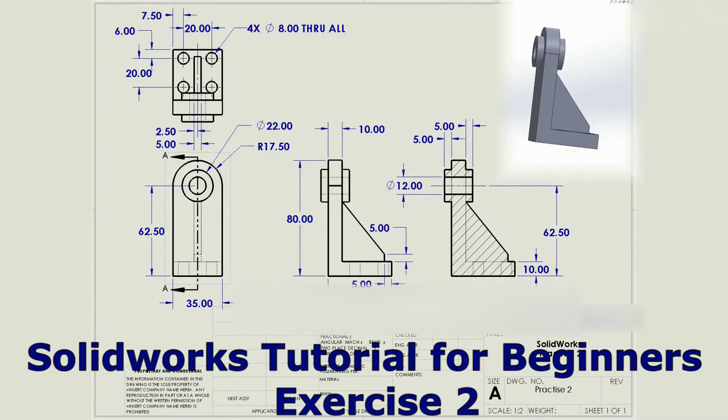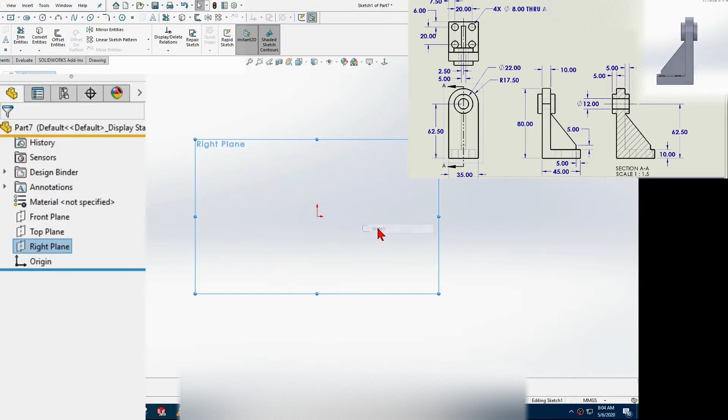I will show you how we can create a simple bracket. I will draw a sketch with the overall dimensions of the bracket: height 80 mm and length 45 mm.

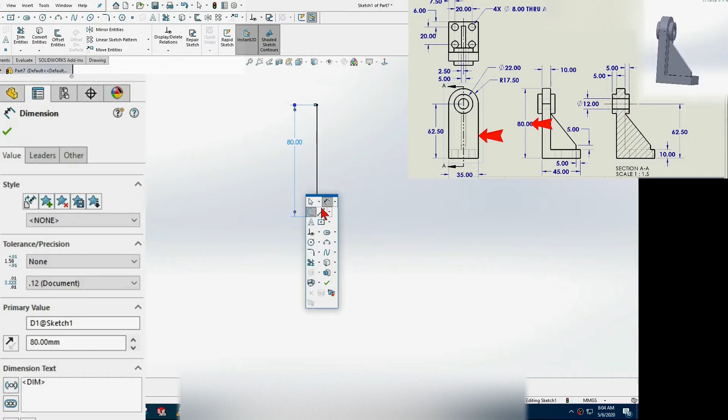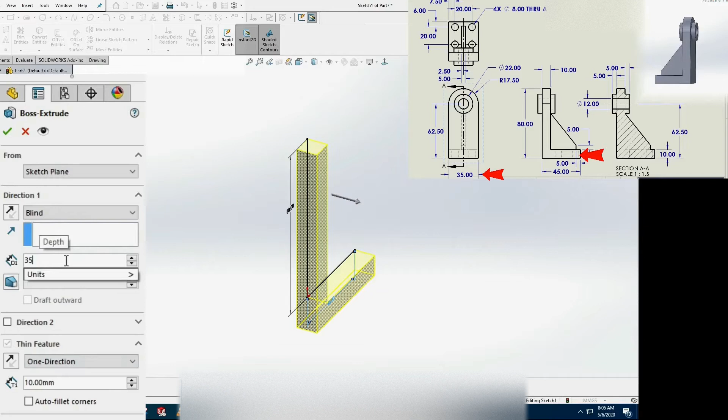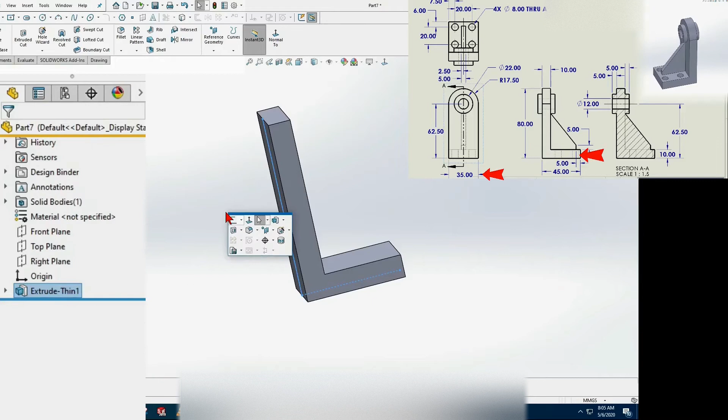Then I use Boss Extrude, Midplane, with the Thin Feature tool, setting the bracket width to 35 mm. I check the direction, and now it is OK. Next, I will make a radius of 17.5 mm, and use the Fillet Full Round tool, selecting 3 faces.

Cut a hole of 12 mm.

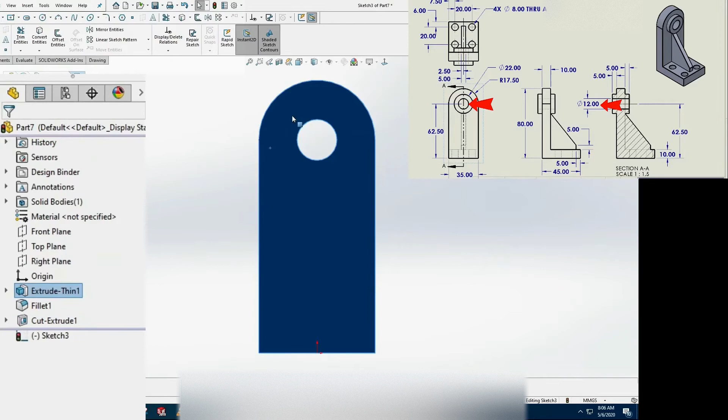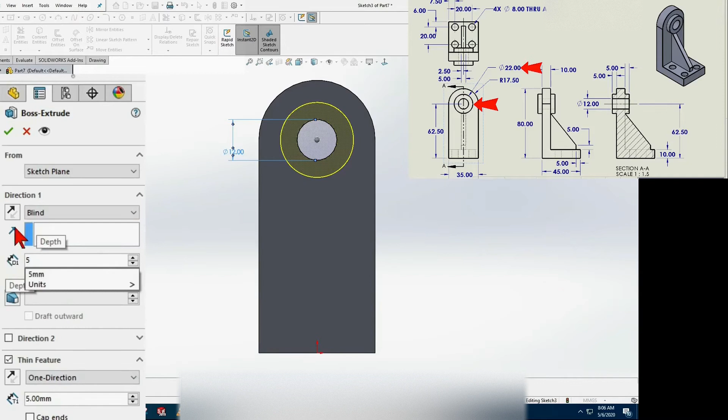Let's go ahead and create 2 washers. For the first one, I use the Boss Extrude Thin Feature tool. For the second one, I will use the Mirror feature, but first I have to create a plane for the mirror.

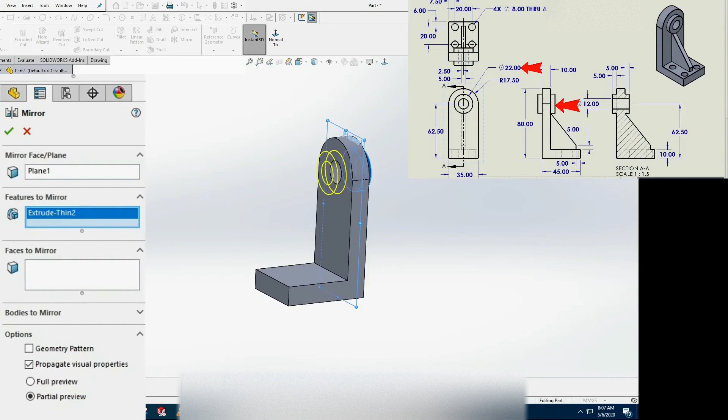So, the washers are done. And I am going to create a rib using the Rib tool. But first, we need a sketch.

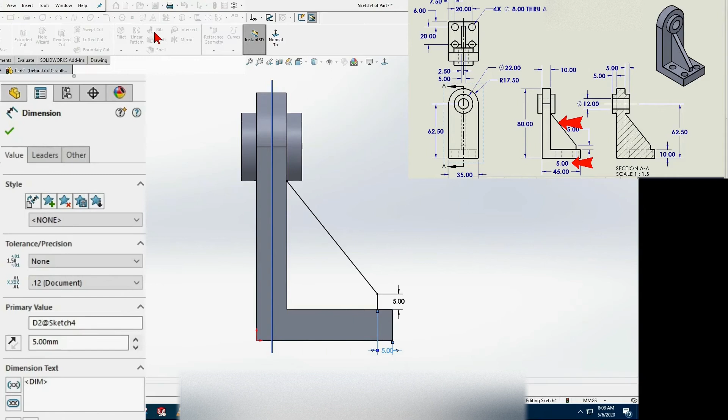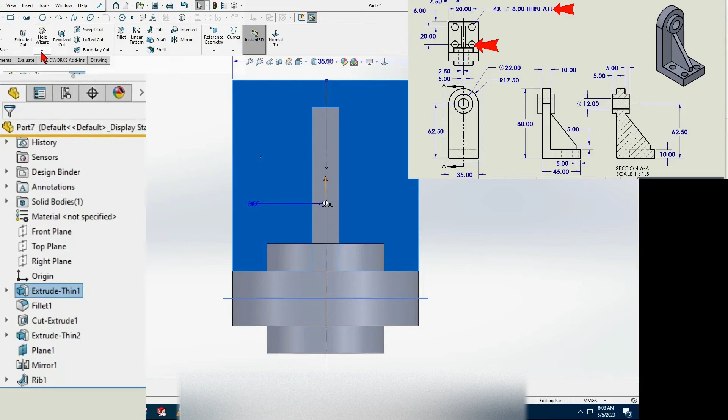So, we can go further. And we will make 4 holes with a diameter of 8 mm. For the holes, I will use the Hole Wizard tool. I select hole, Metric standard, size 8 mm, and condition through all.

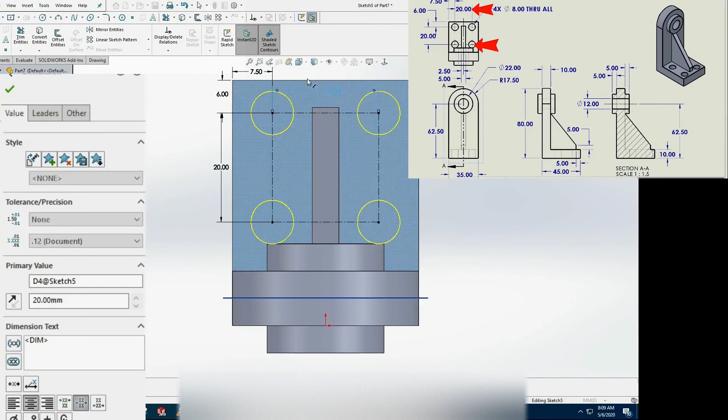Well, today we have created a bracket model.